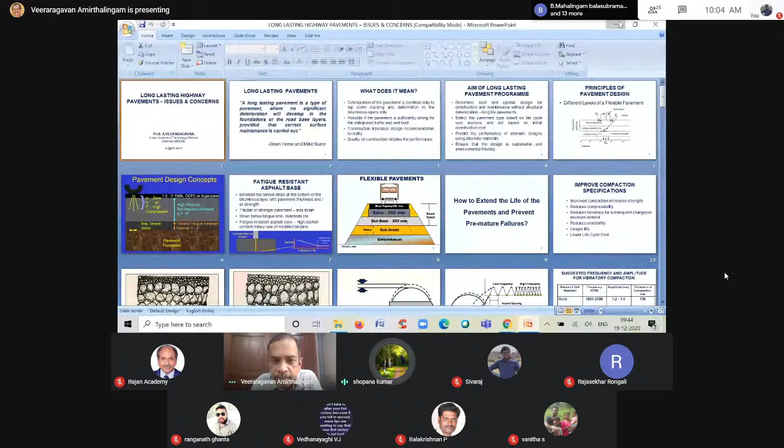Is the screen visible? Yes, sir, clearly. A very good morning to all the participants of this short-term training program. The talk today will be on long-lasting highway pavements, what are the issues and concerns. I'm sure some of you attended the first STTP course organized by Dr. Rajan, where you studied extensively about the different binders, mixes, characterization, etc. In this program, a little more advanced about construction. So what I'm going to talk about is mainly the construction of highway pavements, what are the issues and concerns.

You know pretty well that you design a pavement. The pavement is also a civil engineering structure which needs design. But according to me, the pavement is one of the most complicated civil engineering structures because of several uncertainties - uncertainties in the material, behavior, and its characterization, maybe binder, cement, lime, whatever it is, soil, maybe problem of uncertainty in the mix and the design, climatic factors, traffic variability, environmental conditions, and most importantly, construction quality.

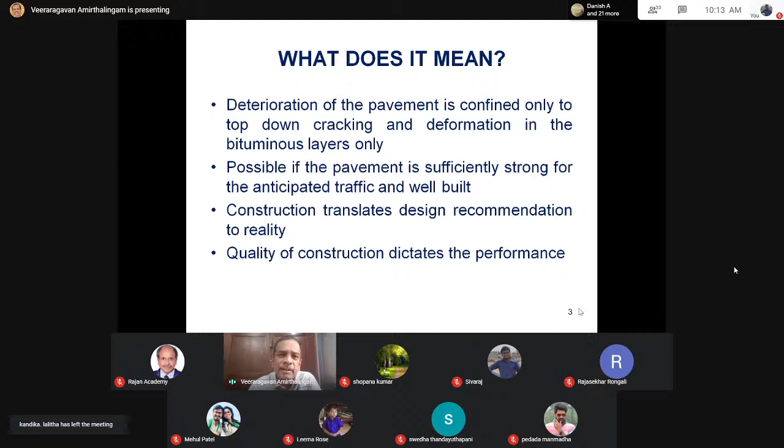That's why I always ask people who test materials in the laboratory and then model the material in the computer without coming to the field. Unless the design is translated exactly as tested in the laboratory, the performance will be entirely different from what was done in the laboratory. So what I found is that it is not the mathematical model and its flaws that fail the performance prediction, it's the quality of construction that fails. Quality of construction, starting from materials, mixes, compaction, density, voids, many factors come into picture. So quality of construction mainly influences the performance of the pavement.

So the aim of a long-lasting pavement program should be to determine what is best. Best in the sense, a design which results in the lowest virgin aggregate consumption. That's why I will call it the best. Not only initial construction, but for a period of 15 to 20 years, you should not warrant major maintenance.

The design should be optimal, such that the quantity of aggregate consumption and binder consumption is also the lowest. You have to decide the pavement type based on the life cycle cost. Normally in the Indian context, whoever quotes lowest, L1, the work is awarded to that agency. But that design, which results in the lowest cost, need not be the one that lasts longer or warrants less maintenance. Therefore, you should design a pavement system and award the project to a contractor who has quoted the lowest life cycle cost. That means you as a client should be capable and knowledgeable enough to evaluate alternate designs.

10 bidders, 10 contractors may submit 10 bids, 10 designs. You have to find out which design will result in a longer life, optimal thickness, optimal design, and improved, excellent performance. So this is the challenge we will face in the years to come, more importantly when aggregates are not available.

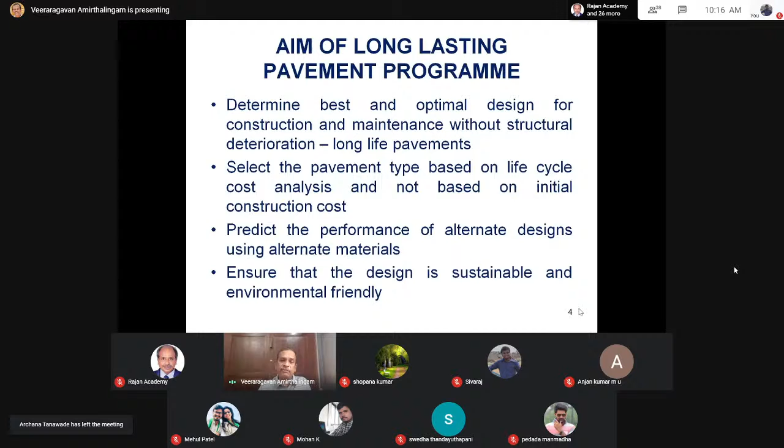So this again I had mentioned in the last class. There are different layers of the pavement. What we expect is that rutting is due to the vertical compressive strain on top of the subgrade. That's my assumption, and I design the pavement based on this assumption. I do not consider the rutting within the bituminous mix.

That's another flaw. Number 2, I expect the cracking in the pavement to occur only from the bottom, where the excessive tensile strain at the bottom of the bituminous layer causes cracking at the bottom. So these are the two basic principles on which the thickness is determined. But what it does not consider is that there can be top-down cracking because of the tensile strain developing here. Do you account for it in the design? No.

Why? Because it is not a structural parameter. How do you account for it? Why does it occur? These occur because of overloading, higher tire pressure, aging of the bitumen, and many other factors. Therefore, the design, according to me, means not only structural design, it should also guarantee functional performance.

Functional performance, in the sense of rutting, surface cracking, raveling, potholes, all should be addressed. That is why I say appropriate selection of the bituminous layers matters. Second, the bituminous layer again consists of 2 different layers: the top layer is different from the bottom layer. Look at the researchers, what they do. They consider the bituminous concrete, they may do a particular gradation or vary the gradation, consider one binder content or optimum binder content, and then test the material. But the top layer should be a rut-resisting layer, and the bottom layer should be a crack-resisting layer. So how do you ensure the layers are rut resistant? How do you ensure the layer is crack resistant? This is another question.

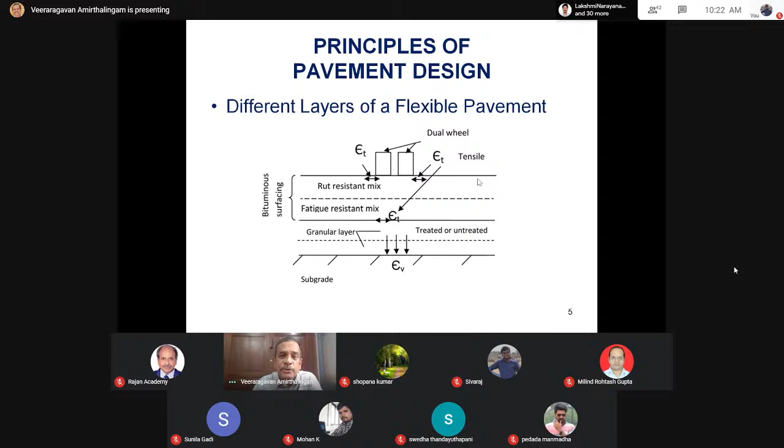So in the pavement design concept, if you want a long-lasting pavement, you should have a high modulus, rut-resistant material at the top, which is 4 to 6 inches, or 10 to 15 centimeters, of high compression, resisting rutting. The bottom layer should take care of the maximum tensile strain, so it should be a flexible, fatigue-resisting material, not a stiff material.

How to make it? Simple—you can increase the binder content by 0.5%, then look at the fatigue life, which may be more. So one way of doing that, can I use a modified binder? Yes. Will the modified binder result in a higher modulus? Maybe. If I have a higher modulus, can I reduce thickness? That becomes the question—whether modulus is the indicator of improved performance.

That is where the entire system of pavement design revolves. What you presume is that higher modulus means better performance. Maybe, maybe not. So higher strength does not mean improved performance—there are many factors that come into the picture.

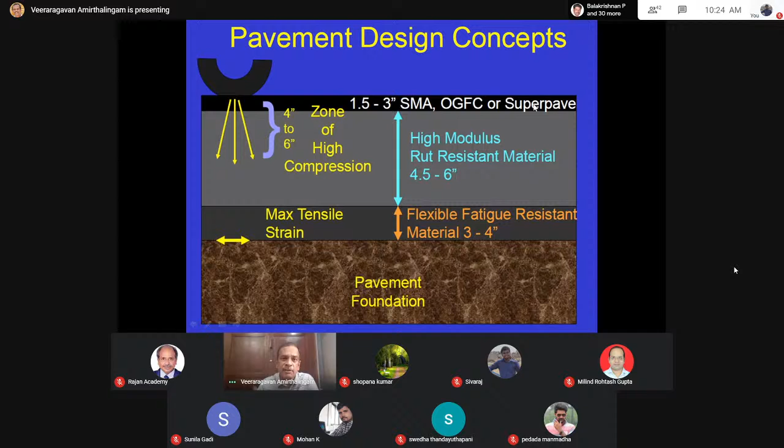But at this point, remember, a high modulus, rut-resisting material is required at the surface course, but that may or may not give adequate skid resistance. Therefore, an open graded friction course of 1.5 to 3 inches, stone matrix asphalt, or a superpave mix is required—good skid resistance along with a good rut-resisting mix. So you have to consider alternate designs of materials and mixes for a long-lasting pavement. When you talk about a fatigue-resisting asphalt base, you try to minimize the tensile strain at the bottom of the bituminous layer with adequate pavement thickness.

I want to reduce the strain. What can I do? Increase the binder content - one solution. Improve thickness, strain values become lower. But increasing thickness means you need more quantity of material, you're increasing the cost. So you have to balance - that's why I said optimal design. Optimal design does not mean lower strain only, but at the same time with a reduced thickness. Thicker or stronger pavement, lesser is the strain. If you can keep the strain values within the allowable limits, you'll find it can take an infinite number of fatigue repetitions. It's possible by high asphalt content, use of modified binders - we have to now design.

So I am always for working backwards. What we do today is test a binder and characterize it, test the mix and characterize it, then use these mix and binder properties in the pavement design for a given traffic, and expect the pavement to perform as per my design. But my question is different - the condition of the pavement at the site may warrant a different design. So I want an improved performance. The question arises, what is the performance that you need? Is it only fatigue cracking and rutting, or something else?

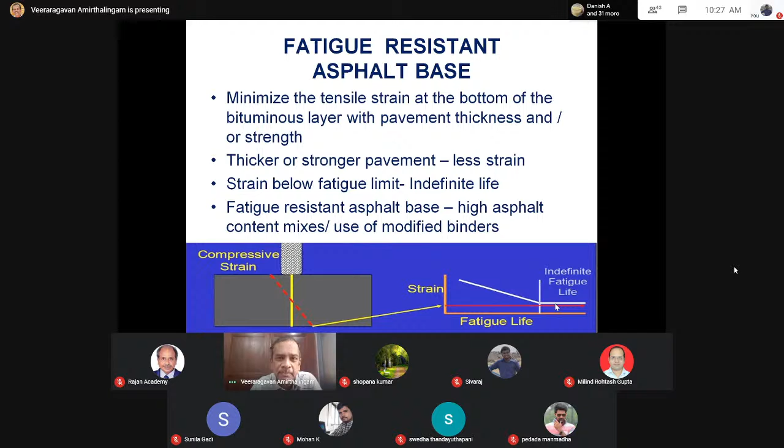Finally, proof of the pudding is in the eating - I need good performance. When I know that the material I test in the laboratory may or may not be the one I'm using in the field, what you should do is take the field core and find the modulus. Don't expect to compact them perfectly in the laboratory - find some number, use that in the design and find out thickness. Go to the field, take 10 cores, 20 cores, 30 cores, test them. Check whether they are getting the modulus as you designed. If not, adopt that modulus - again, statistics have to come into the picture.

So a pavement consists of different layers, starting from the embankment, subgrade, subbase, base course, and the blacktop. The blacktop, which is maybe around 200 millimeters, costs nearly 40% of the total pavement cost.

Therefore, if you want to reduce the cost of construction, the simplest solution is to reduce the thickness of the bituminous layers. How should you do that? You can do that by improving the strength of the lower layers - simple, lower layers are cheaper. For example, subgrade soil may cost a few hundred rupees, 200, 300, 400, 500 rupees per cubic meter. Subbase may cost 1,000 to 1,500 rupees per cubic meter. Base course may cost 1,500 to 2,000 rupees per cubic meter. But the blacktop costs 8,000 to 12,000 rupees per cubic meter. So if you want to reduce the cost of construction, reduce the thickness of the bituminous layer by improving the lower or supporting layers.

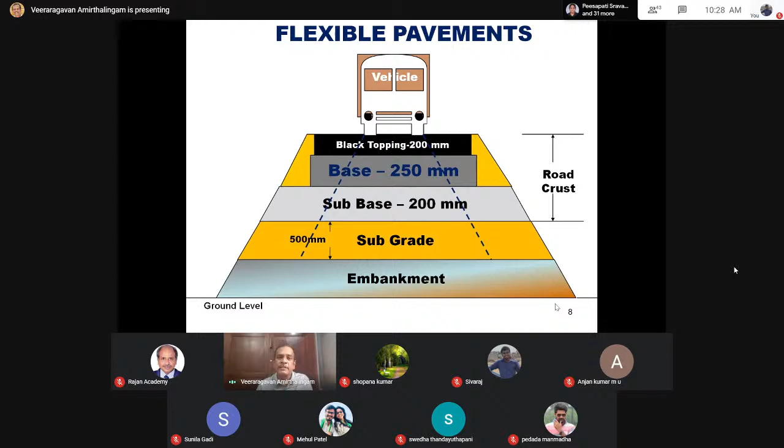So how do you extend the life of the pavement? How do you prevent failure - that's something you should answer. Simple, as I was mentioning, is to improve the compaction. For a given soil, that's again relating theory of the lab to the field. In the lab, you do compaction using a Proctor compaction, either IS light or IS heavy. How is that related to field compaction by a steel wheeled roller, which is 10 tons, 12 tons, whereas you are testing with 2 kg, 1 kg hammers? Will that reflect the same result? It may not be.

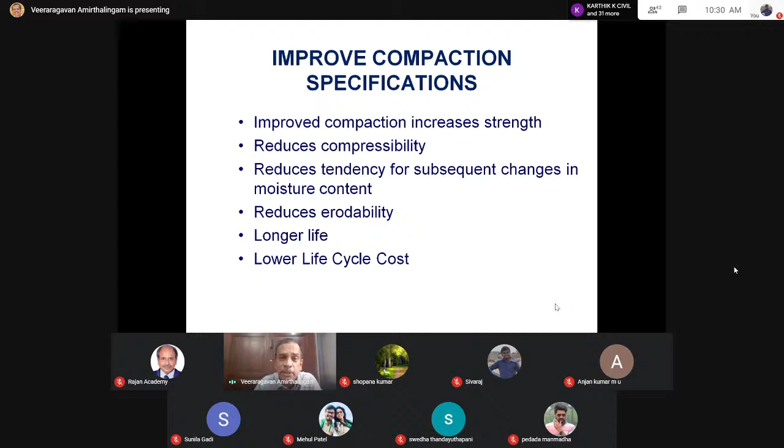Will you be able to get a higher density than the laboratory density in the field? Yes, it's possible, because modern compaction machinery is capable of compacting to a density much higher than your laboratory density. Your lab molds and rammers weigh maybe 2 or 3 kgs, but in the field it's 10 to 12 tons. So by improving the compaction, you can reduce the compressibility, reduce subsequent volume changes due to moisture variations. Erosion is reduced, life extends, it warrants less maintenance and hence lower life cycle cost. So the simplest solution I can think of is improve the compaction. What we normally do is compact a soil or aggregate layer about a meter, 50 centimeters, or 30 centimeters in one layer.

When you compact this 30 centimeter in one layer, you'll always find voids. The roller which compacts here will not be able to ensure that the fines fill these voids and make it dense. So the static roller of 10 tons may not be able to compact well.

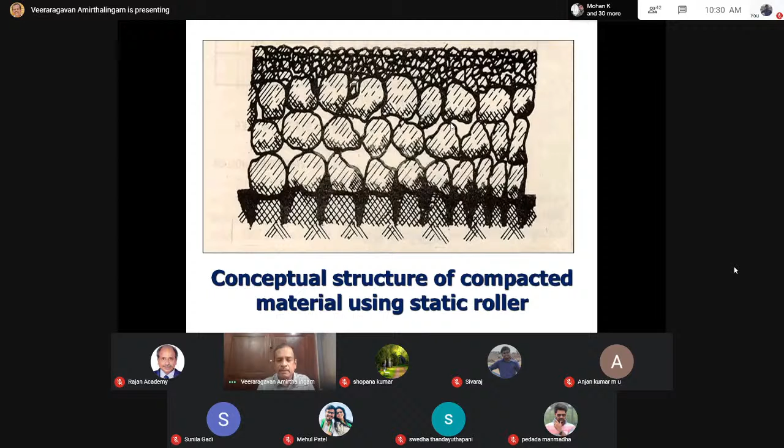On the other hand, if I use a vibratory roller, then I will be able to compact to a much, much denser mass. As I have been repeatedly telling, higher density means lesser voids, means improved performance. This again means lower thickness of the layer.

For example, if you are getting a CBR, say 6% or 7% CBR at IS light compaction, change over to IS heavy compaction. This 6 will become 8 or 9, this 7 will become 9 or 10. Then you will find that the thickness requirement of the pavement layer will be lesser. Simple, I am not doing anything. The same soil, I am compacting to a higher density.

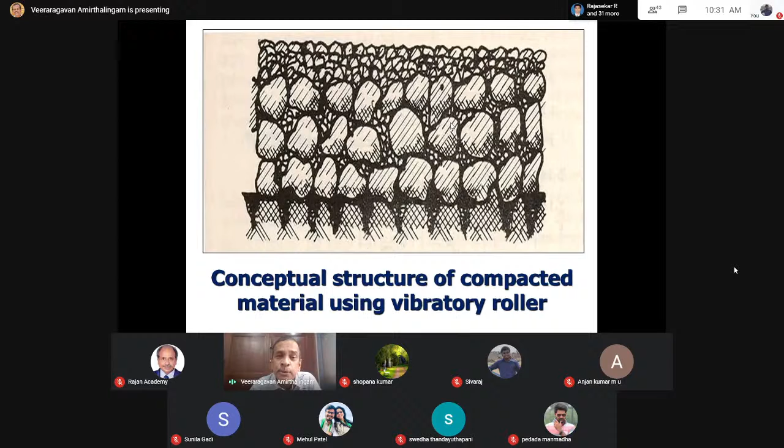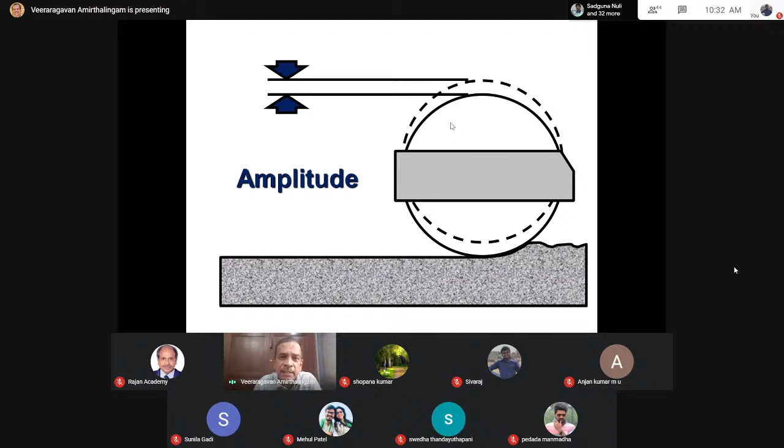Similarly, use of appropriate rollers in the field will guarantee you improved compaction, improved density, improved strength, and hence improved performance. So in case of vibratory roller, two factors come into picture. One is the amplitude, where the wheel goes up and down. Other is frequency, the number of times the load is applied on the surface.

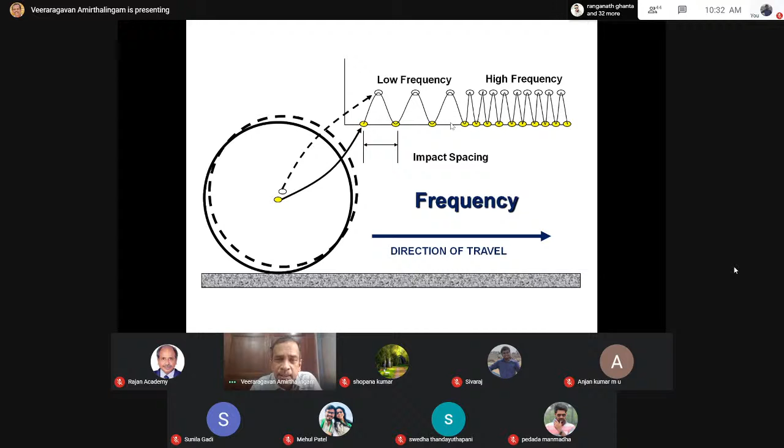One can be low frequency, other can be high frequency. So if you want improved compaction, improved density, improved performance, this is something you should look for. Depending upon the type of material you are using, you have to choose the appropriate amplitude and frequency. For sand and gravel, the recommended amplitude is 0.8 to 1.2 millimeter, and the frequency is of the order of 1600 to 2000 cycles per minute.

Whereas when the vibratory roller is used to compact bituminous layers, the amplitude should be 0.4 to 0.6, and the frequency should be 2500 to 3500. As a thumb rule, it is high amplitude, low frequency for soils.

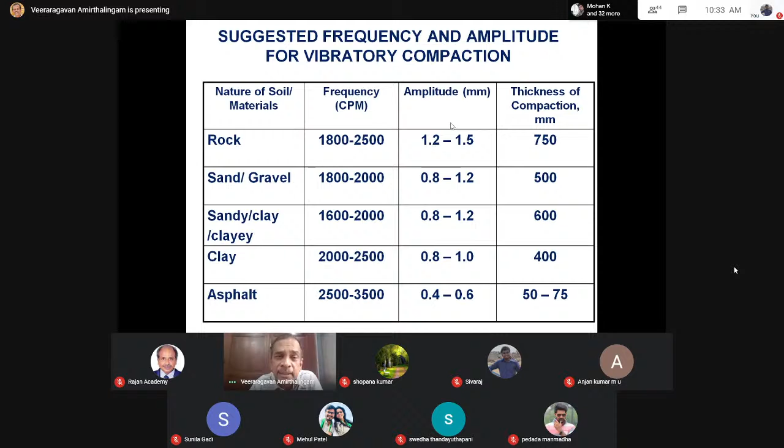It is high frequency and low amplitude for the bituminous layers. So if you do the opposite, it will not be able to compact as you want. But you should know the ranges of amplitude and frequency. Construct a test track, test section, 30 meters long, 3.75 meters wide. Check the density after 3 passes, 5 passes, 8 passes with a field density test, and then decide the number of passes required.

Now, a number of nuclear and non-nuclear density gauges have come. Instead of taking a sand pouring apparatus, you'll be able to test hundreds of points in a day. Within a minute, you'll get the density of compaction. You can decide the depth of the layer for which you want to check the density. But it needs calibration. Once you calibrate, I'll be able to do several hundred tests in a day.

So after you use a calibrated density gauge, this will ensure the density is approximately uniform along the length of the road as well as across the width.

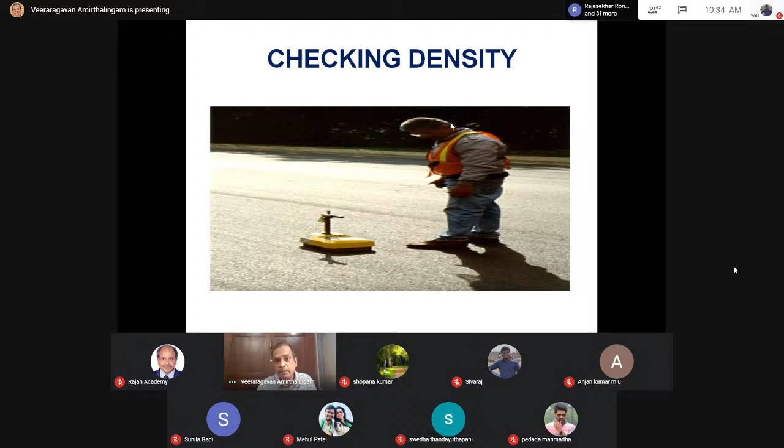Because of this variation in density, you'll find at some location there's a pothole, and 10 meters down, there is no pothole. Same soil, same roller, why? Compaction is more in one place, compaction is less in other places. If you use such density gauges, you will ensure the density of compaction is uniform along the length of the road as well as across its width.

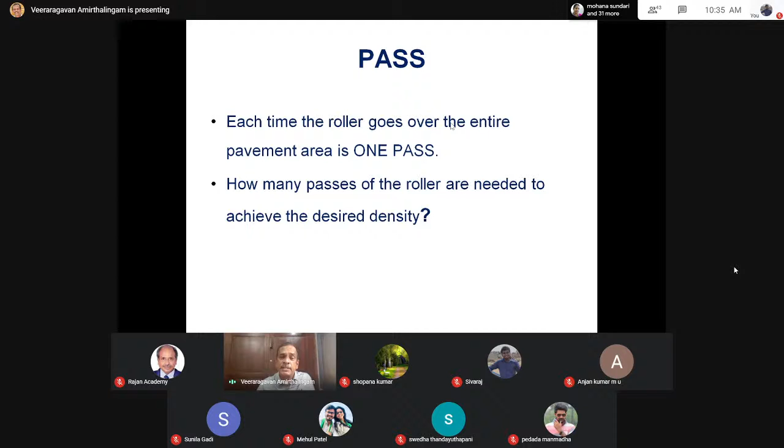A pass: each time a roller passes over the entire area, it is called a pass. How many passes are required to achieve the required amount of compaction? A roller goes up and down, overlapping by one-third each time - 1, 2, 3, then from the other end, 4, 5, and 6. This entire sequence of 6 operations constitutes one roller pass, not 6 passes - one roller pass. Like this, 6 passes may be required, or 8 passes may be required.

This layer 1 provides confinement to layer 2. Layers 1 and 2 provide confinement to layer 3. That's why 1, 2, 3, 4, 5, 6 - this constitutes a single pass.

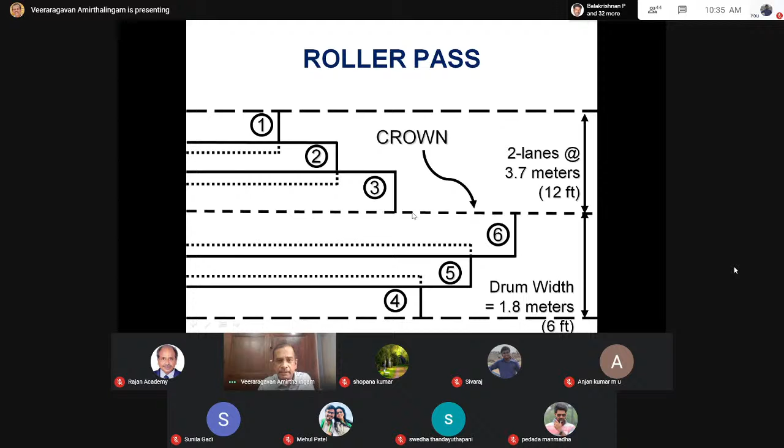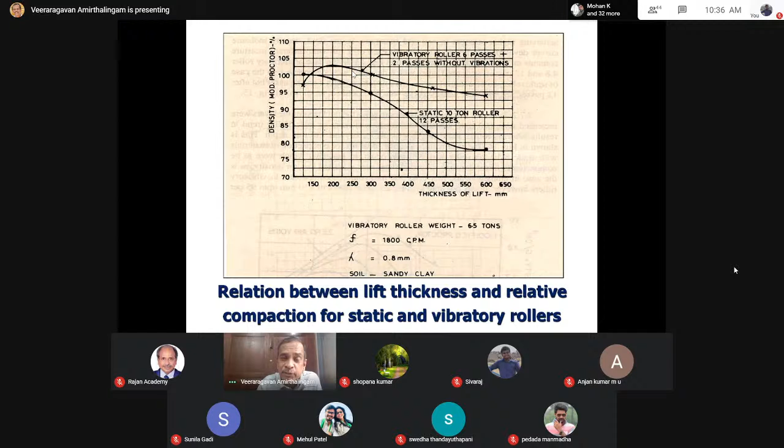So right amplitude, right frequency, right weight of the roller. Depending upon soil type, you should be able to find out what density is achievable. A soil that is compacted to high density will perform better.

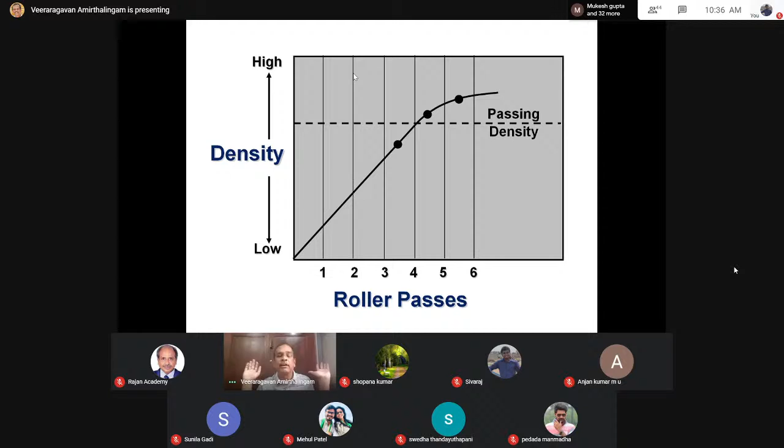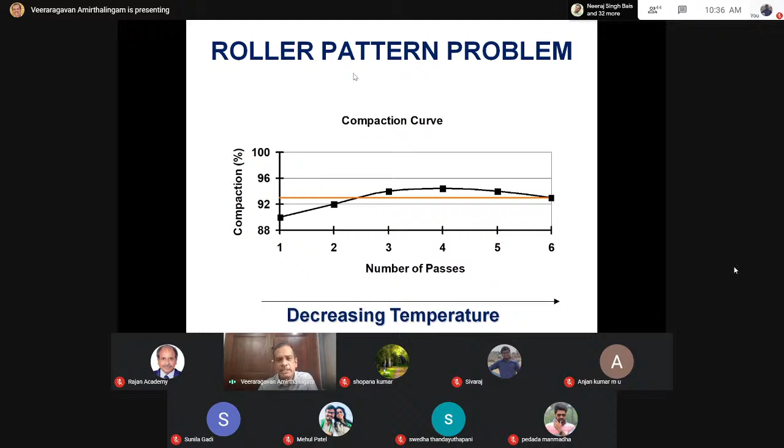But as the number of passes increases, the density keeps on increasing, but it will reach a particular value beyond which the soils will say, no, I cannot be compacted further. Then the density will fall down. Its surface will develop cracks. Water will get in. Therefore, you have to establish a rolling pattern, find out the maximum number of passes required to achieve the maximum density achievable in the field.

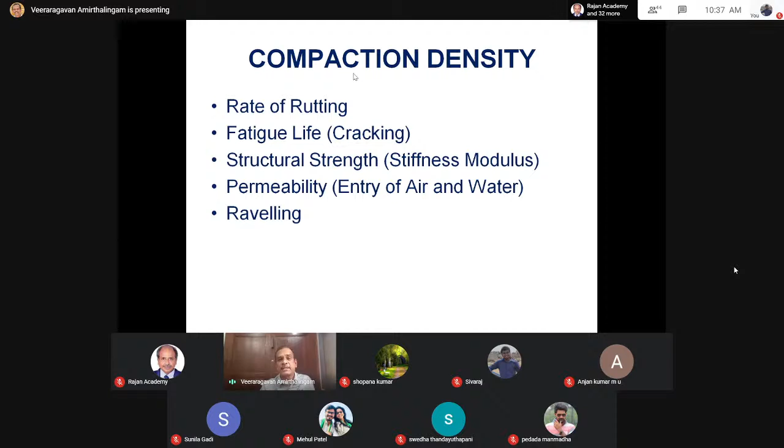So once you achieve a higher density, rutting will be lower, fatigue life will be higher, structural strength will be more, permeability is low, raveling will be less. So the simplest measure for a long-lasting pavement is to improve the compaction standards, improve the density of compaction of the soil as well as the embankment layers.

Second, drainage. Drainage, it is always said that there are 3 causes for poor performance of a pavement: 1 is drainage, 2 is drainage, 3 is drainage. Especially for a civil engineer, I always tell that water will never pardon you. If you don't give it the respect it deserves, it will always remain.

Whether it's a case of a roof slab or a pavement. In a roof slab, it will drip down on your head, saying that you never cared while you were casting the slab, I'm here. Similarly, in the pavement, it will form a pothole and it will remain there.

So design of the drainage system is a key element for the design of pavement systems. The performance directly depends upon the quality of the drainage. If you are able to drain off the water in the quickest possible time, your pavement will last longer. Otherwise, even if you put a steel plate, it will not work.

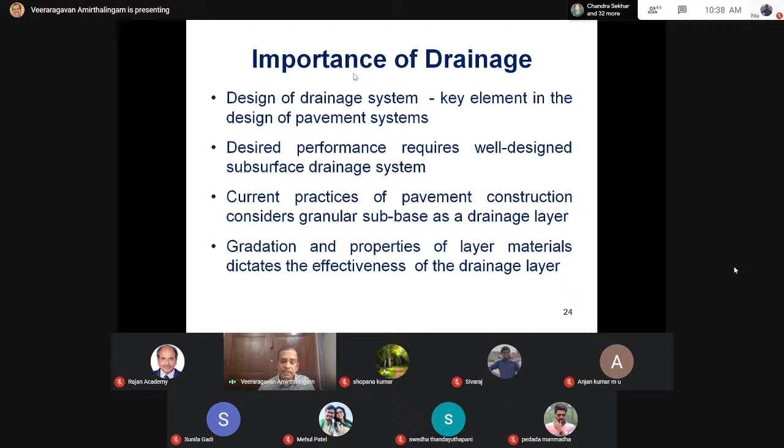So currently in India, we consider granular subbase. Of late, we are using cement treated subbase also. The gradation and the binder properties, material properties play an important role. If you don't ensure adequate drainage, water gets entrapped in the pavement system. So you should study what is the influence of sub-surface drainage on the performance.

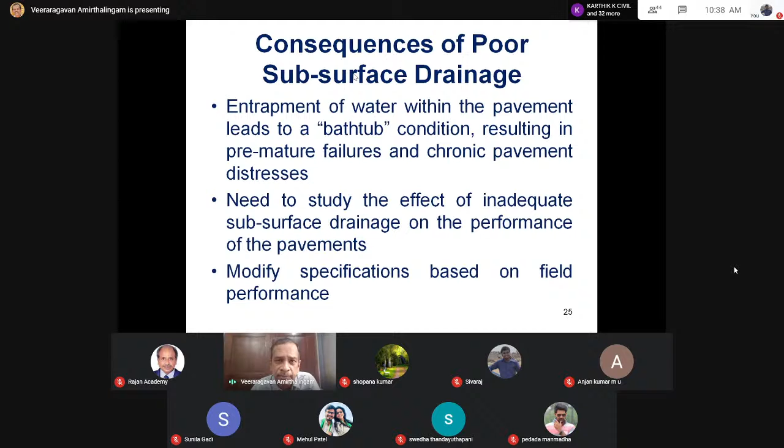So if you look at the IRC gradations, there are 6 gradations that they have given. The water can get into the pavement through the shoulders, earthen shoulders. That can be seepage from the high ground level. There's a rising water table, there will be capillary action.

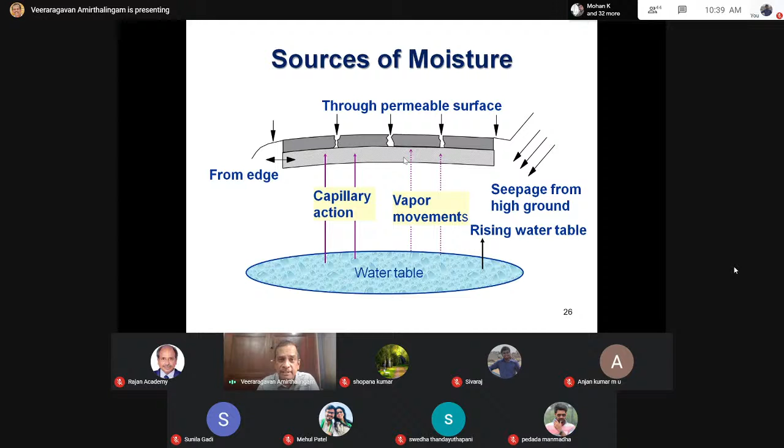Through the potholes and cracks, water will get in. This will saturate the subgrade, saturate the base course, saturate the subbase. And the load carrying capacity of the pavement system is lower. It will weaken the pavement layers, it will degrade the material, and it also ensures that there will be a lack of bond between the bituminous layer and the granular layer.

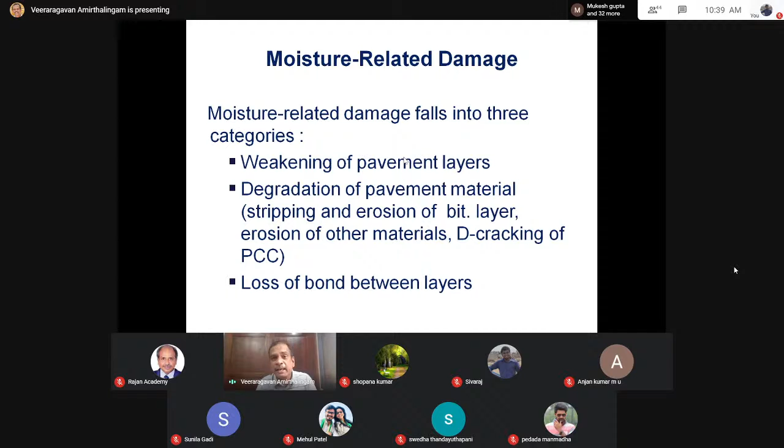But all these three occur simultaneously. This damage will occur only in the post-monsoon period. For example, in Tamil Nadu, now in December, January, the subgrade is saturated. With heavy overloading, more rutting will occur, more failures will occur, shear deformation will occur. So more damages will occur when a weakened pavement is subjected to heavy axle loads.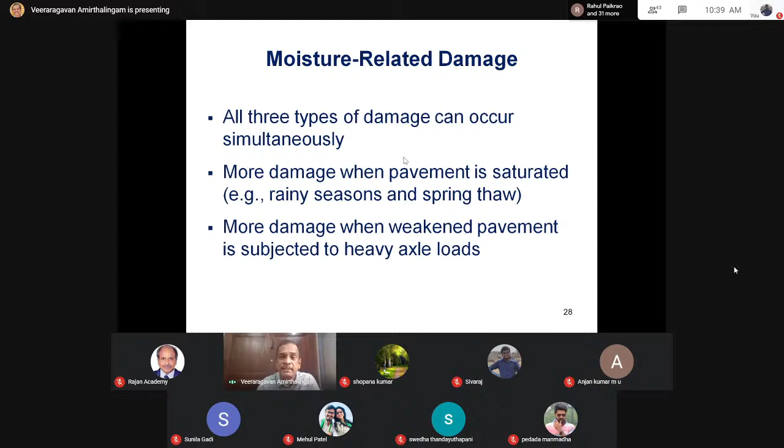Post-harvest season, trucks are overloaded, subgrade is saturated. As a result, there will be more rutting and shear deformation likely to occur. So in the case of the bituminous layer, water will strip off the binder. With hydrostatic pressure, it tries to strip off the aggregates from the bitumen, and you will find that a bituminous layer will look like a granular layer.

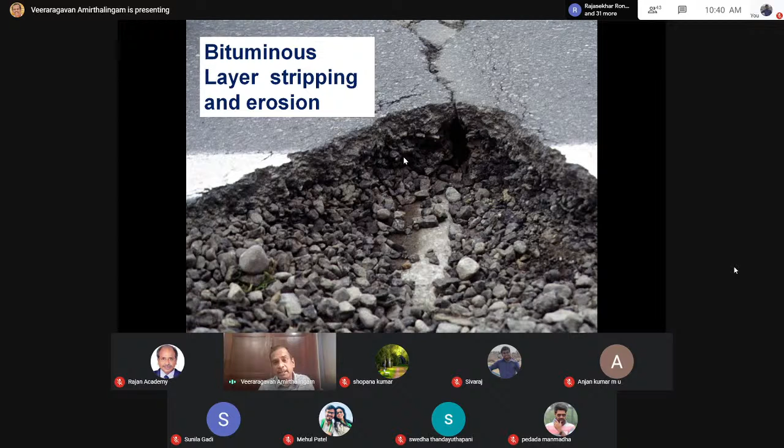You find that the major factor influencing the permeability is the fines, fines in the sense passing through 75 micron. Earlier, we had permitted fines up to 10%. And we found that the cause for the failure is fines, too much of fines. Now we have reduced the fines to less than 5%.

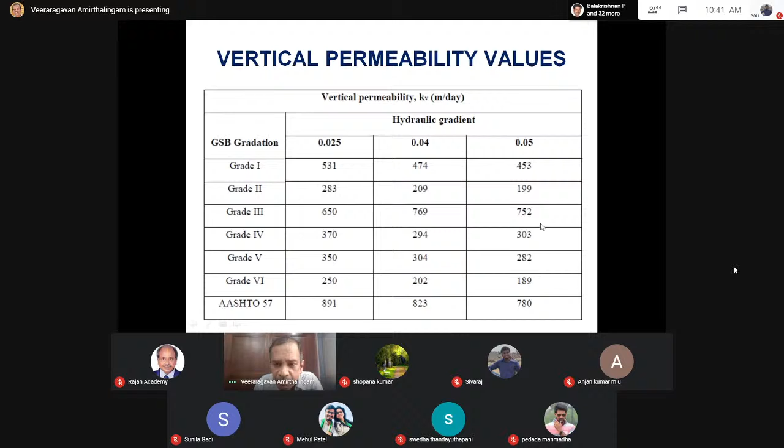If you look at the vertical permeability, you'll find grading 3 and 4 meet the requirement of 300 meters per day. Even if you look at the horizontal permeability, they meet the requirements. So of all the 6 gradations in the IRC or ministry specification, grading 3 and grading 4 will meet the requirements of permeability.

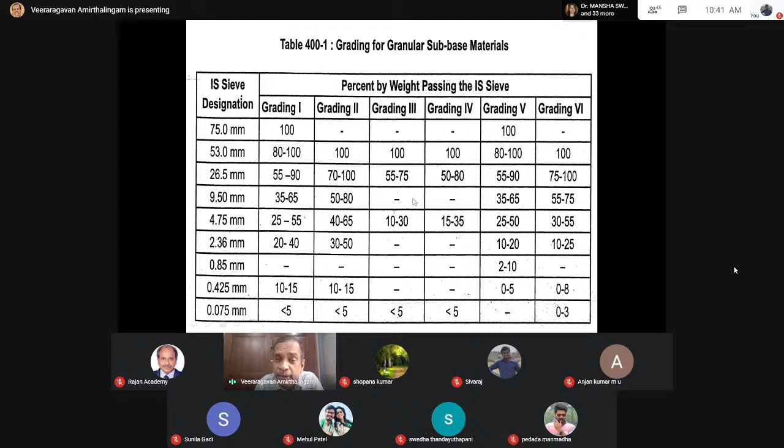So even though six gradations are given, you should adopt either grading 3 or 4, and extend it for the full formation width. Only then will the water be able to drain off from the pavement to the drains.

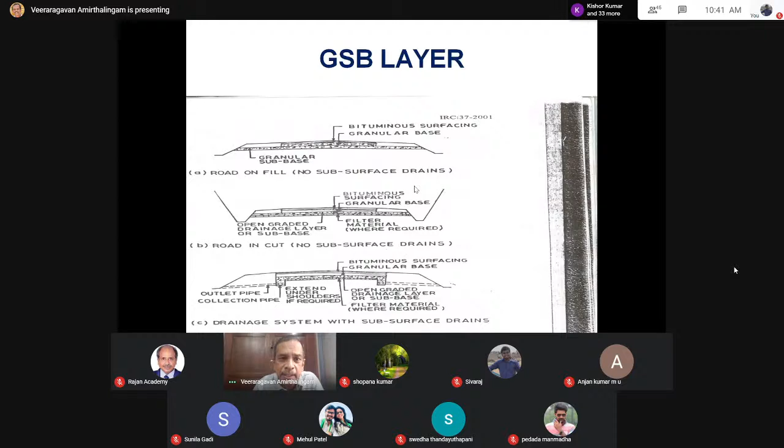Bituminous layers: first we saw the subgrade and its compaction, second the sub-base and its importance. Third, bituminous layers should offer high resistance to deformation and fatigue. They should reduce stresses at the bottom layers, not undergo environmental degradation, be as impervious as possible, have good workability so required density and voids are achieved, sufficient texture to avoid skidding accidents, and allow me to predict pavement performance.

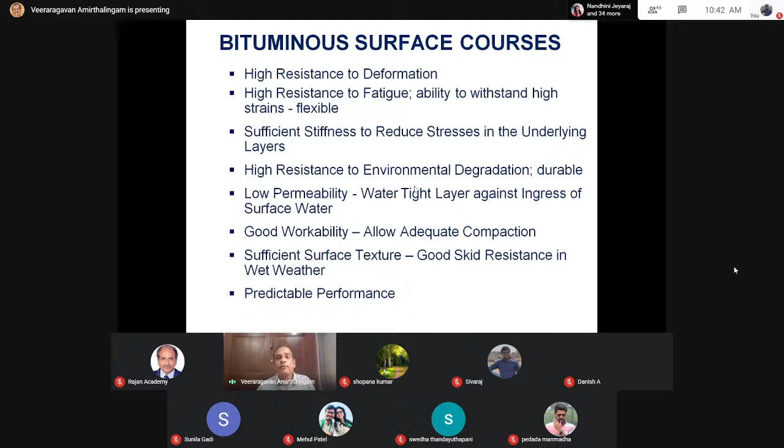By now you understand there is nothing like a one-size-fits-all design. Different types of surface courses exist, so we have different specifications. Some are good, some are bad. The specification doesn't tell you to use this or that—it is for the engineer to decide.

Bituminous macadam is an open-graded, highly permeable recipe mix—no mix design, only gradation and binder content. Its strength is 50% of dense bituminous macadam, and it is not cheaper than DBM.

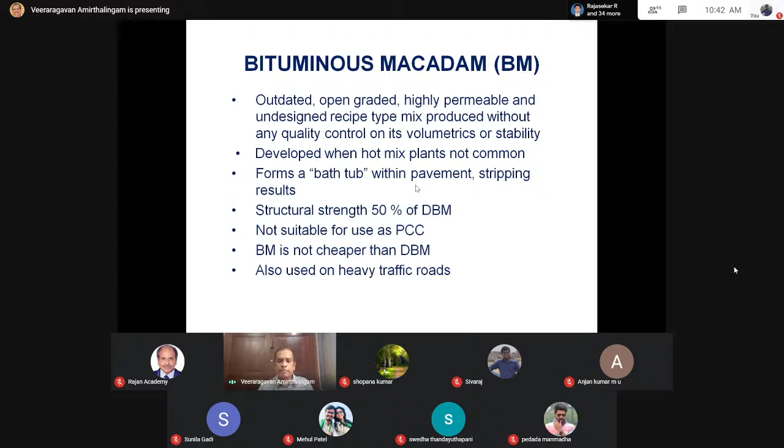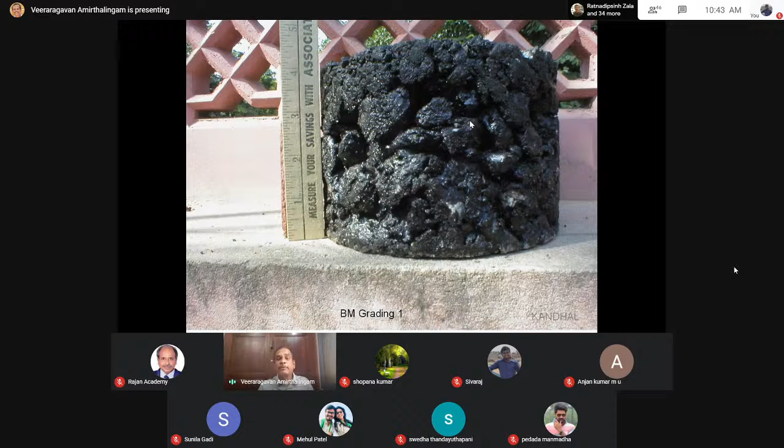If you use a bituminous macadam like this, there are a lot of voids, so it will entrap water and not allow it to drain out. As a result, the pavement will prematurely strip off—either grading 1 or grading 2, both are permeable. Therefore, for long-lasting pavements, do not adopt such pervious mixes.

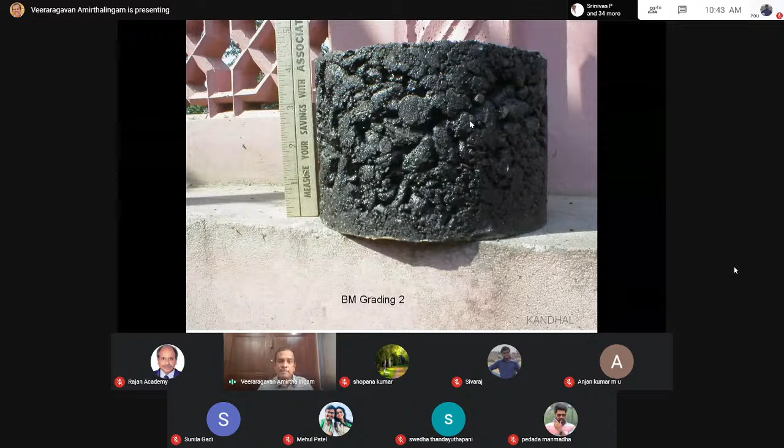That's a simple lesson: when you have a poorly graded mix, you find it's not dense. Take a glass of water and pour it on this—the entire water will get into it. So the bottom line for a long-lasting pavement is not to adopt such pervious bituminous layers.

There are different gradations given in IRC for DBM, SDBC, and BC, with thicknesses also specified. I want you to look at one parameter: the nominal maximum aggregate size. This is the size at which some aggregates are retained—so whatever is retained, that's 90 to 100 at 26.5.

NMAS is 26.5, 90 to 100 at 13.2. So nominal maximum aggregate size is the largest sieve in which aggregates are retained. There's also another philosophy which says 10% of the aggregate is retained, but in India we adopt the sieve size in which 10% material is retained as the nominal maximum aggregate size.

Second, if H is the thickness of a given layer, the nominal maximum aggregate size should be 1/3 to 1/4 of the layer thickness. This means if 100 millimeters is the thickness of one bituminous layer, the maximum aggregate size can be 26.5 and down.

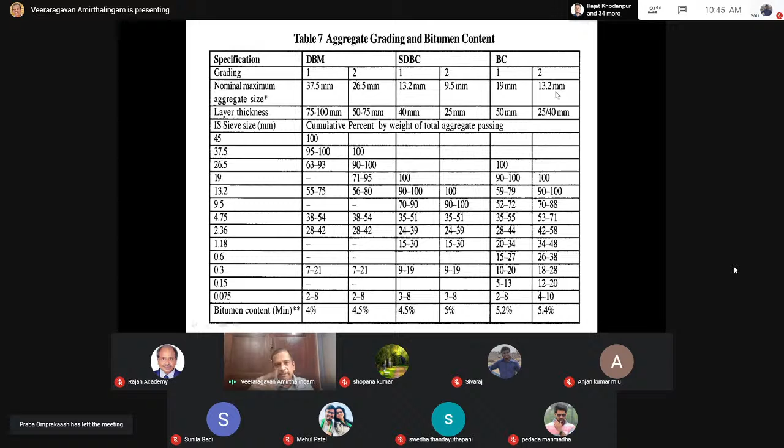Second, as aggregate size becomes smaller, binder content becomes more—it's worth it because it makes the mix denser. So if you move from DBM to SDBC to BC, binder content changes from 4 to 4.5, 4.5 to 5, 5.2 to 5.4. Smaller aggregate sizes—19 millimeter, 13.2 millimeter—mean more surface area and hence more binder content.

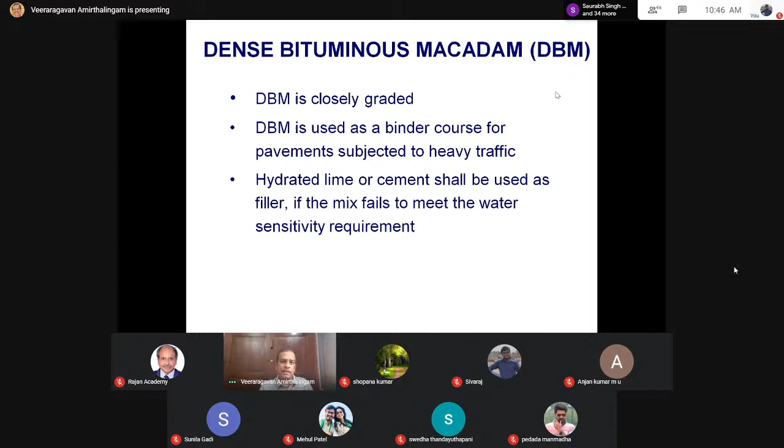DBM is closely graded and used as a binder course, not a wearing course. This DBM can be 37.5 and 26.5 as we just saw, with percentage passing 4.75 remaining the same. The problem is there's only a marginal gain because binder content is 0.5% lesser, but there is a lot of segregation and high permeability, hence it's not recommended.

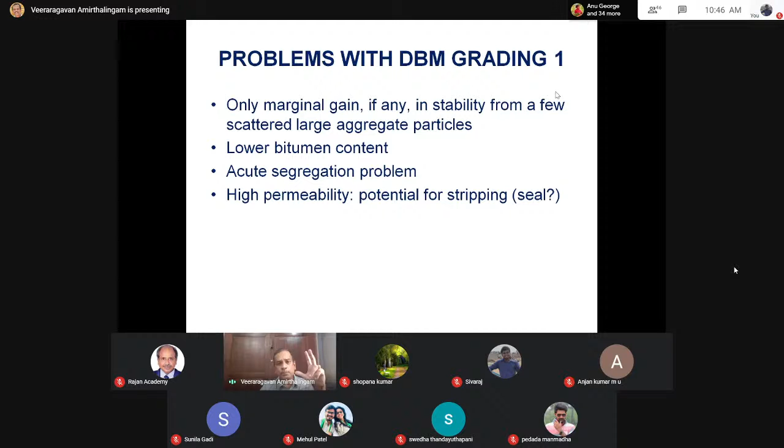So if you want a 75 millimeter thick binder course, use grading 2 only. If you have 150 millimeters, use 2 layers of grading 2, not 1 layer of grading 1 and 1 layer of grading 2—otherwise you'll find a lot of segregation and water will enter into the pavement. There's also a relation between voids and permeability: at 25 millimeters, even 5-6% voids will have higher permeability.

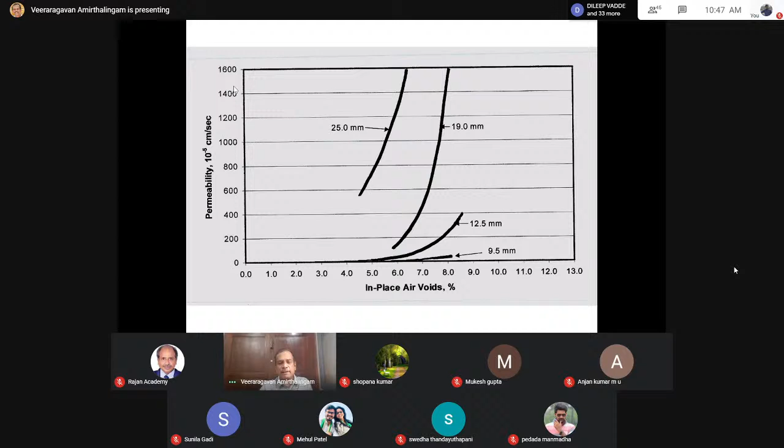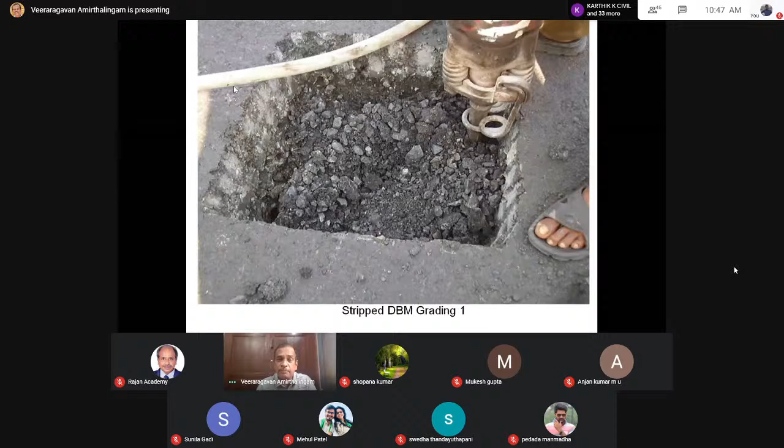We want an impermeable mix. Therefore, apart from the aggregate gradation and binder content, the density of compaction also plays an important role. If you take a core of a DBM specimen and check, you'll find there's no binder at all, because grading 1 allows more water in and it strips off. So you'll find stripping of the DBM layer. Therefore, in lieu of grading 1, adopt grading 2.

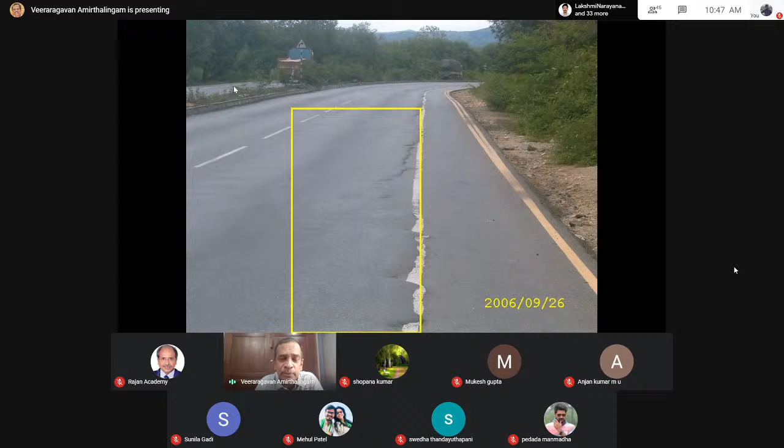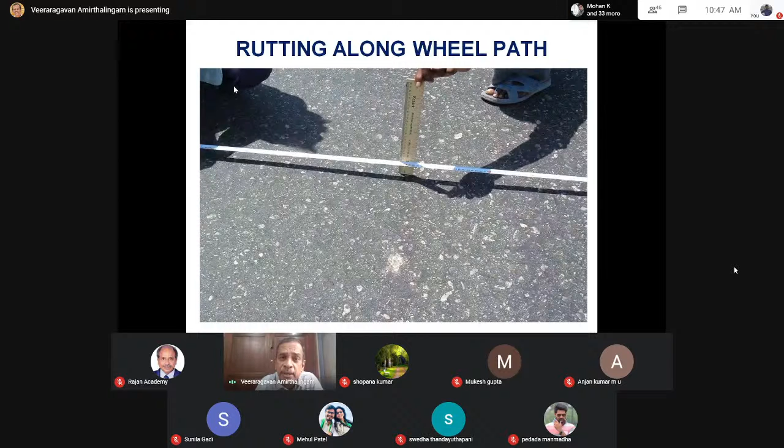There can also be a case where the bituminous surface course remains intact, but the binder course expands and shears off, resulting in rutting. So you'll find that if the voids in the mix are very high, it will crack. If it's very low, it will bleed - not crack, but bleed. So now I have to strike a balance between cracking and rutting.

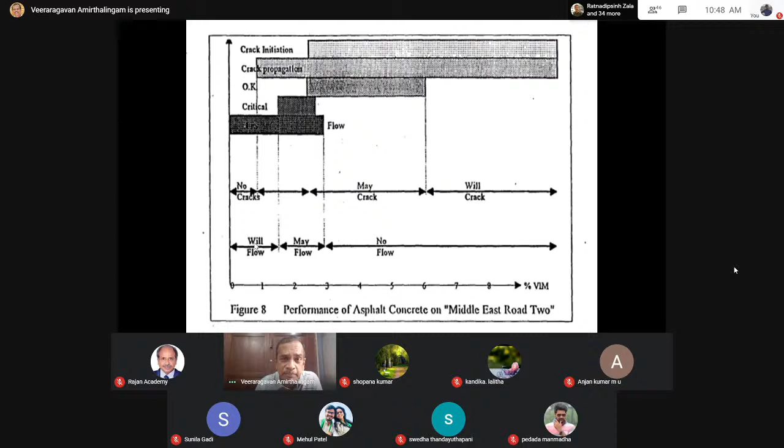The layer will undergo densification. Voids will decrease with the passage of traffic. So what should the voids be initially? What we found is that when you open the road to traffic, if the initial void is around 7%, this 7 will come to 6, 5, 4, and will stop at 4. Therefore, the maximum density to which I should compact - the theoretical maximum density - should only be 93% of the maximum dry density. There should be 7% voids initially.

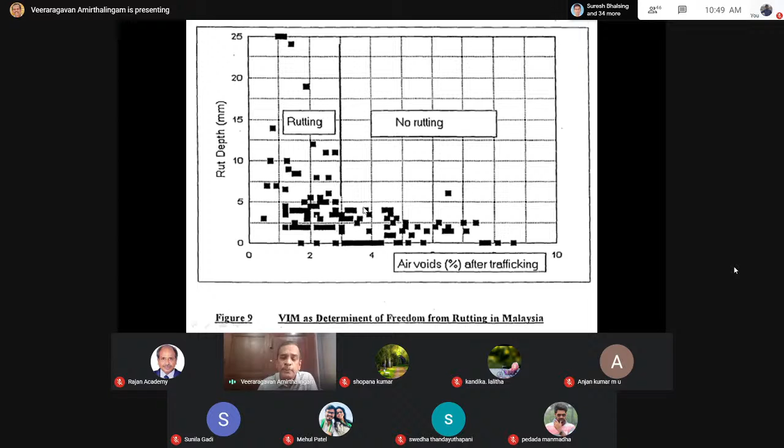In the case of low voids, you'll find the air voids after trafficking is less than 4, and there is a lot of rutting. With around 4, you'll find the rutting is much, much lower. So compact to the required density. A 1.5% increase in compaction density leads to a 10% increase in fatigue life. Therefore, if you do not compact it to the required density, your pavement will prematurely fail.

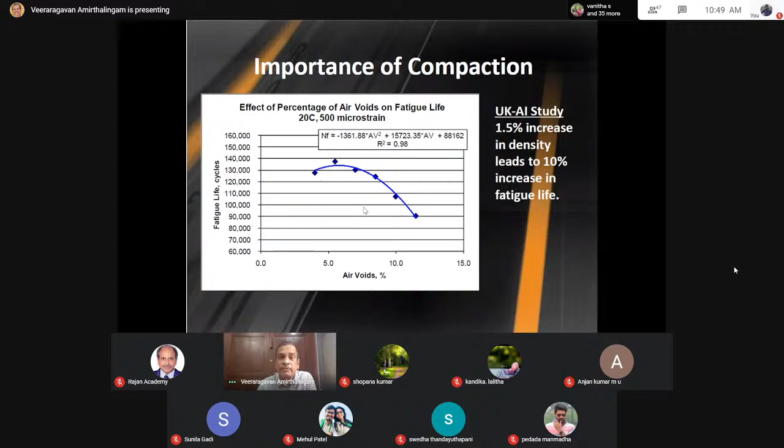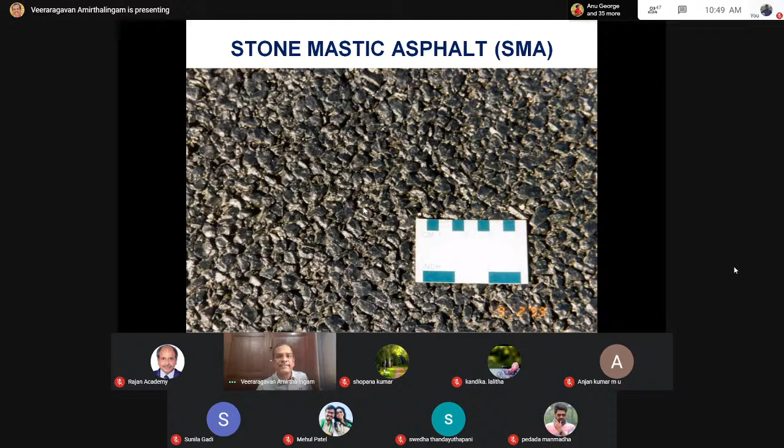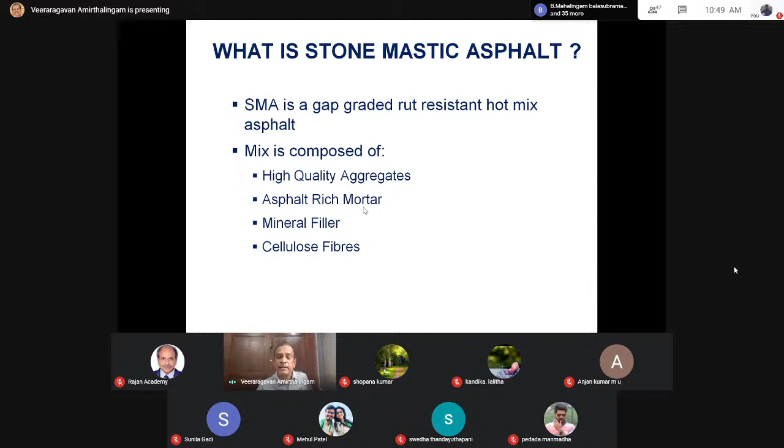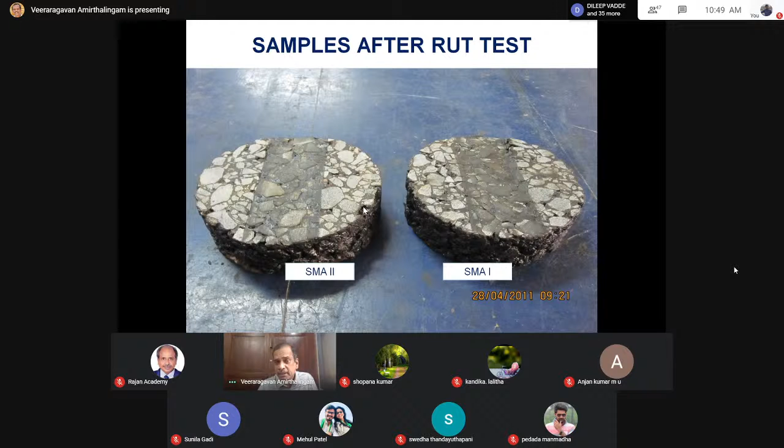So I showed about the shear deformation. What is the solution now? The solution is stone mastic asphalt, or stone matrix asphalt - there are different terminologies. This is a rut-resisting, gap-graded mix. It consists of aggregates, asphalt-rich mortar, mineral filler, and cellulose fibers. If you adopt this, you'll find SMA grade 1 and grade 2 show no rutting, no shear deformation. So if the traffic is very heavy and you want a long-lasting pavement, in lieu of bituminous concrete, adopt stone matrix asphalt - it will last longer without any rutting.

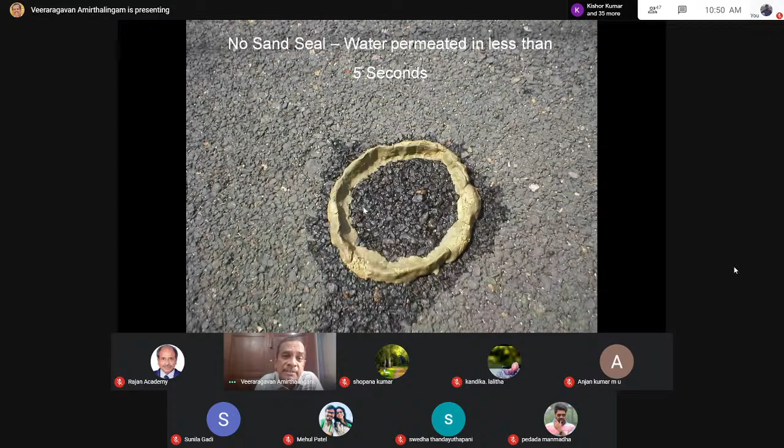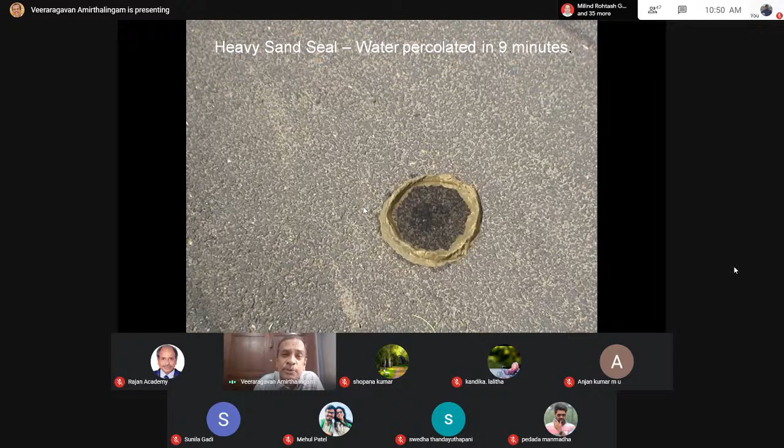With thin layers, when premix carpet is adopted, you'll find a lot of potholes occurring on the surface. If there's no seal coat, water will be permeated in less than 5 seconds. With a moderate seal coat, it will percolate in 90 seconds. With a heavy seal coat, still water will get in. The lesson learned: premix carpet is not the surface course to be adopted - it is permeable. With a bituminous concrete surface, water will not permeate.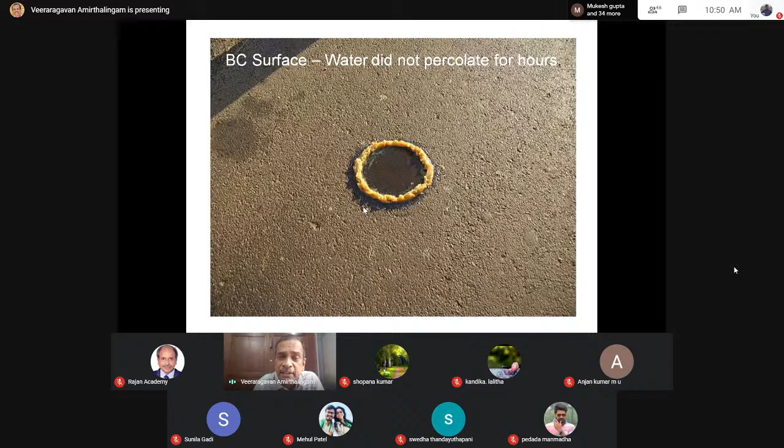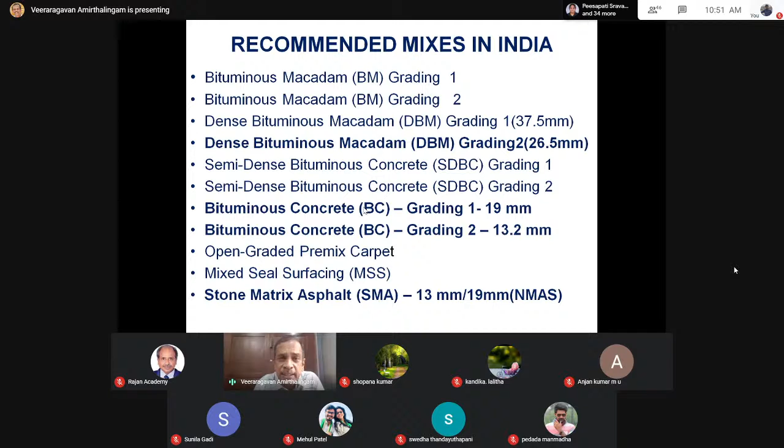Mix design is there, with high binder content. So even for rural roads, you should not adopt open-graded premix carpet. There are different technologies - either surface dressing or dense mixes. There are different gradation mixes adopted in India. The simplest mix I can adopt is dense bituminous macadam grade 2, bituminous concrete grading 1 or grading 2, or stone matrix asphalt. If you adopt any of these, most pavements in India will definitely last longer.

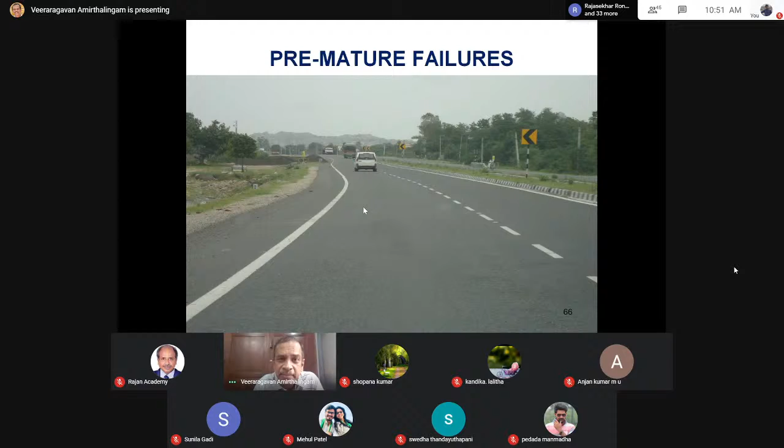There are cases of premature failure. This is a highway in India, 240 kilometers, constructed spending 2,400 crores. The pavements started failing 3 months after opening to traffic. This is the same section - I'm not showing a different section, same highway, it has failed. You'll find cracks within 3 months.

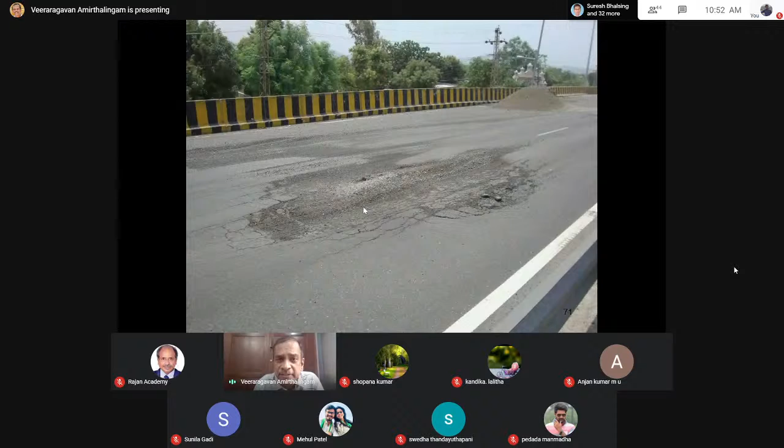It was opened to traffic in July; in August, September I went. These are photographs I took - potholes, cracks, rutting, you'll find rutting also. Again stripping, shear failures - all the distresses you can talk about. But what went wrong? If you look at it, the compaction was inadequate, because the stability was inadequate. Binder content was low. In the case of dense bituminous macadam, air voids and compaction - even though the binder content was okay, compaction density plays an important role, resulting in poor performance.

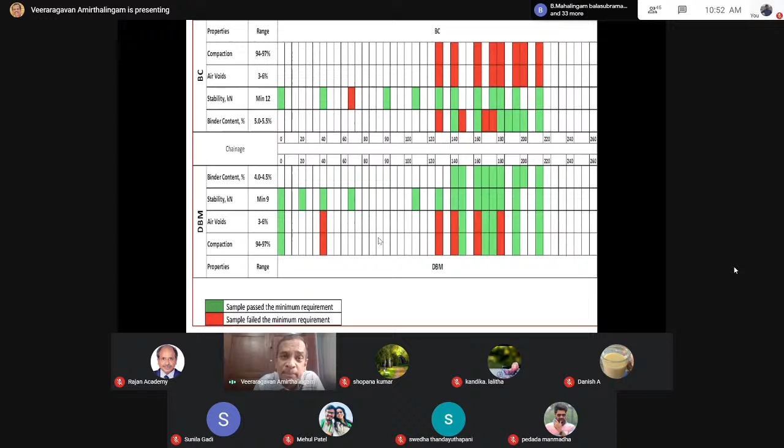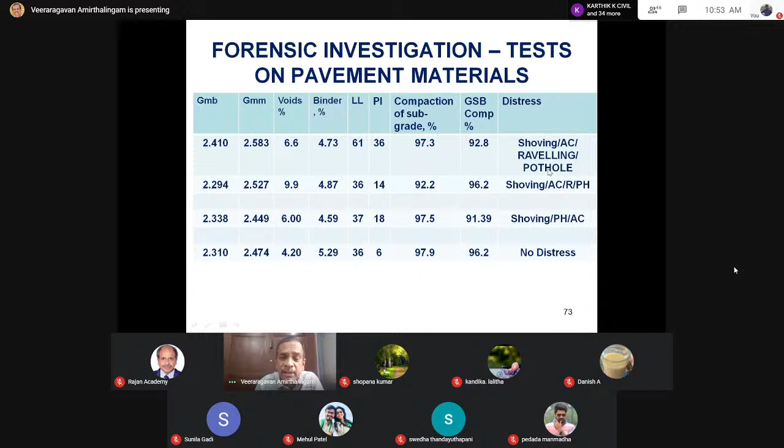On paper, your mix is good, but when you translate the mix into reality, you miserably fail. From forensic investigation, we found that material compacted to higher densities, say 96.2, compact subgrade to 97, 98, shows no distress. When compacted to 92%, subgrade to 97 only, you'll find shoving, alligator cracking, raveling, and potholes. So poor quality construction will reduce the life of the pavement significantly.

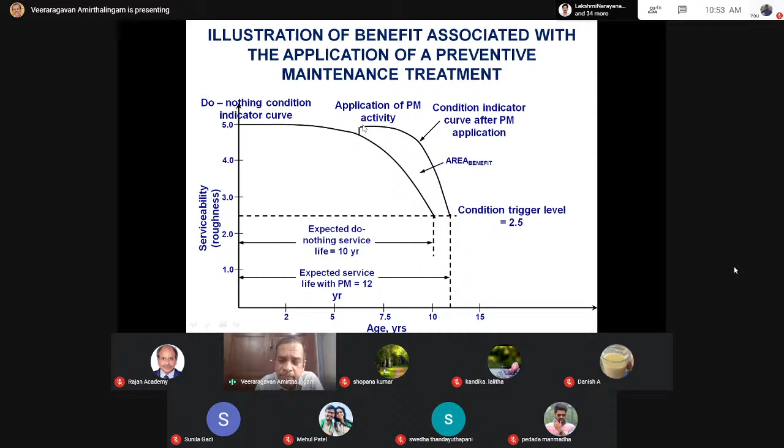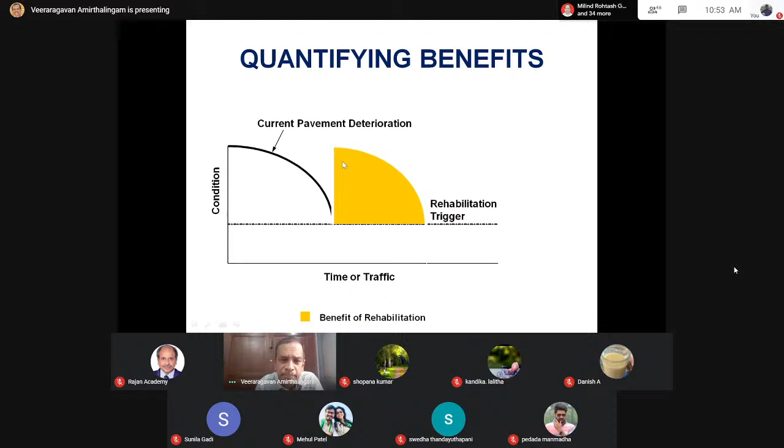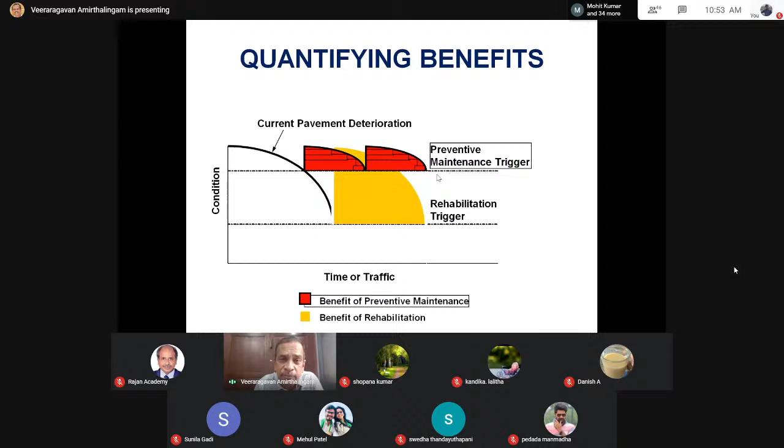Preventive maintenance is something we should be able to do. If you do preventive maintenance for a long-lasting pavement, you'll find the life of the pavement will extend. What treatments can be done? You can also quantify the benefits. Suppose if we do a treatment here, assume this shaded area is the benefit. A treatment here costs less but will extend the life of the pavement. So what is needed for a long-lasting pavement in India is to go in for preventive maintenance. Compare preventive maintenance with rehabilitation, the benefit cost ratio of preventive maintenance is much, much higher than conventional rehabilitation. Yet, a stitch in time saves nine.

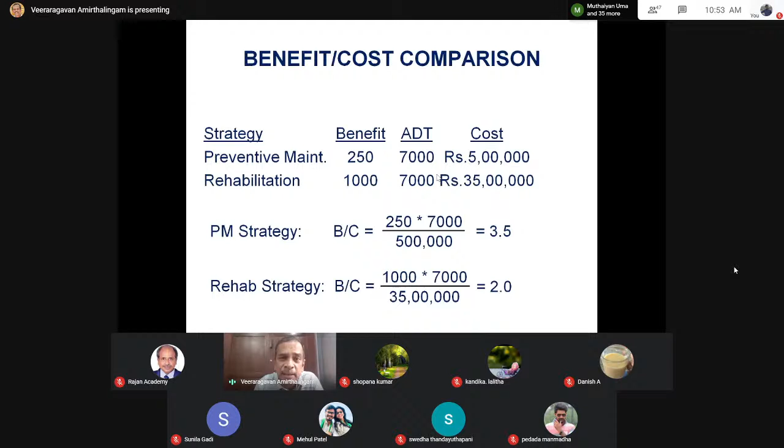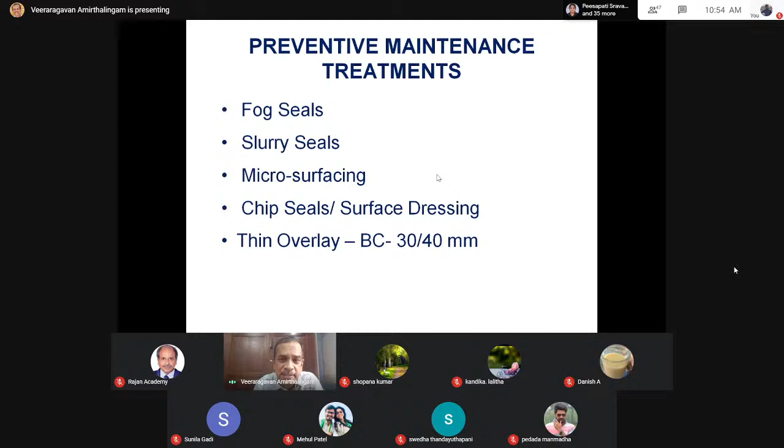There are different treatments available: fog seal, slurry seal, microsurfacing, chip seal, thin overlays. Any of these can be adopted. They are cheaper but will extend the life of the pavement and guarantee improved performance. Fog seal is an application of diluted slow-setting emulsion, which will prevent the aging or hardening of the binder. Slurry seal is a mixture of fine aggregate, filler, and emulsion, again a cold mix. This will improve friction and ensure that raveling is taken care of. Therefore, it's a cheaper treatment, less than 100 to 150 rupees per square meter.

You can also go in for other treatments, such as microsurfacing, which can also be adopted. This microsurfacing, when adopted, may cost less than 200 rupees per square meter and will guarantee satisfactory performance. So, I think that's a problem with the slides.

So what I want to conclude is that good compaction will guarantee satisfactory performance. Good subsurface drainage will also guarantee satisfactory performance.